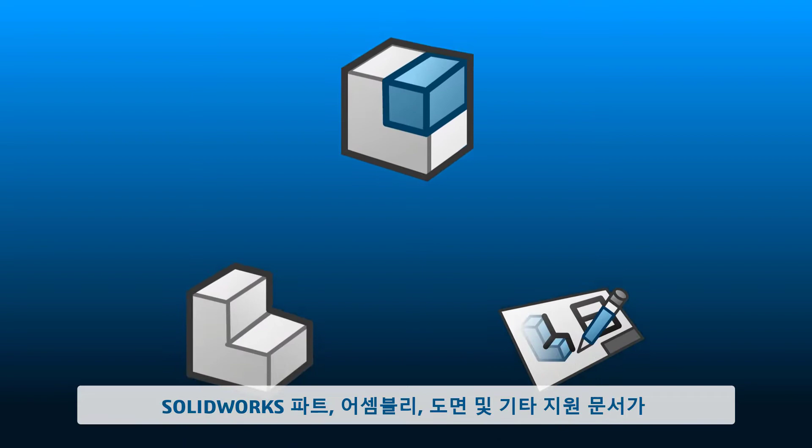Whether you work in a large organization or just a small team, no doubt you're concerned with storing, managing, and collaborating on your design data. And it's tricky, because SOLIDWORKS parts, assemblies, drawings, and other supporting documents, they're all linked. Consumer cloud storage apps don't know how to handle that. Maybe the investment in SOLIDWORKS PDM and Manage isn't right for you.

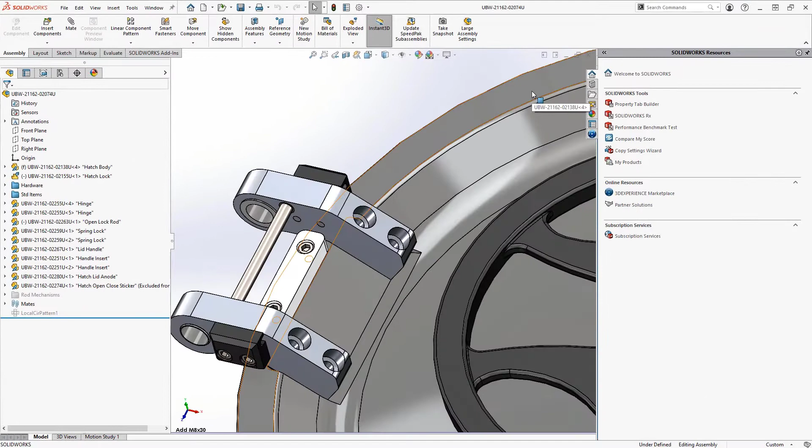There is another way. When you connect SOLIDWORKS to the 3DEXPERIENCE platform, cloud data management is just a few clicks away. Eric Engineer and Debbie Designer are part of the team working on the NEMO submersible. They are on a tight deadline to finish up the hatch design. Eric puts the finishing touches on the latch mount by inserting fasteners from SOLIDWORKS Toolbox. A quick check on the assembly drawing and everything is up to date and ready to save to the cloud.

First, he logs into the 3DEXPERIENCE platform. It's his team's secure connection to the cloud. Right from the task pane, he sees the status of his work. These indicators show which components need to be saved. As for the hardware and other standard parts, SOLIDWORKS is configured to automatically catalog and release these items so all users can access their shared libraries online.

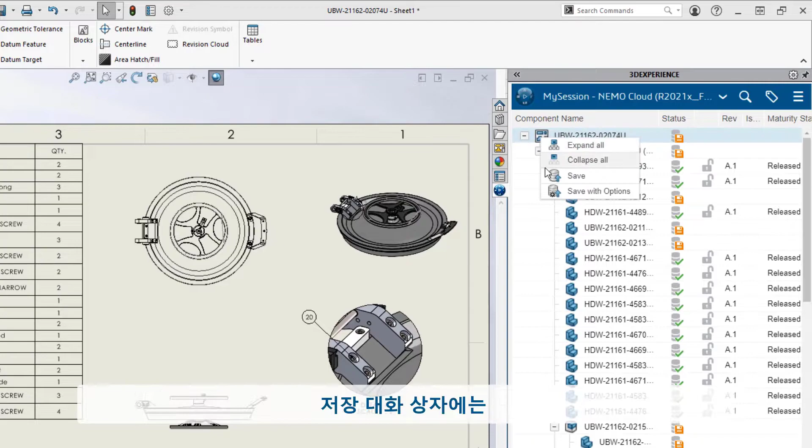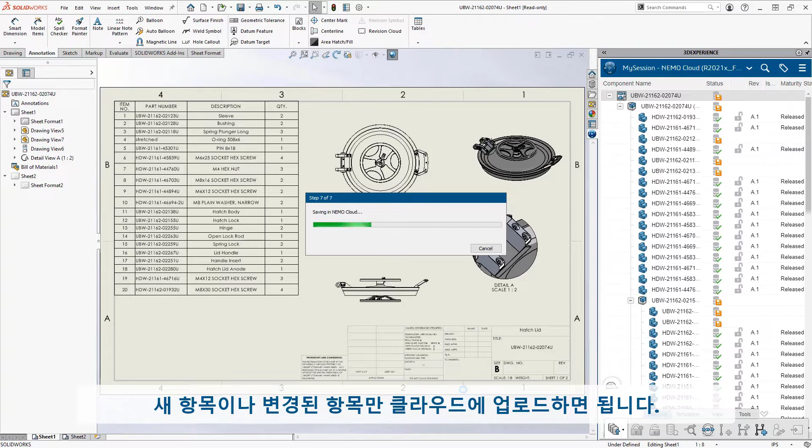The Save dialog shows exactly which items require an update. He can also assign any item to a bookmark, such as related drawing files. Out of a long list of components like this, bookmarks are a convenient way to flag them for easy access. Only the new or changed items need to be uploaded to the cloud. This makes efficient use of network bandwidth, but still ensures everything is up to date.

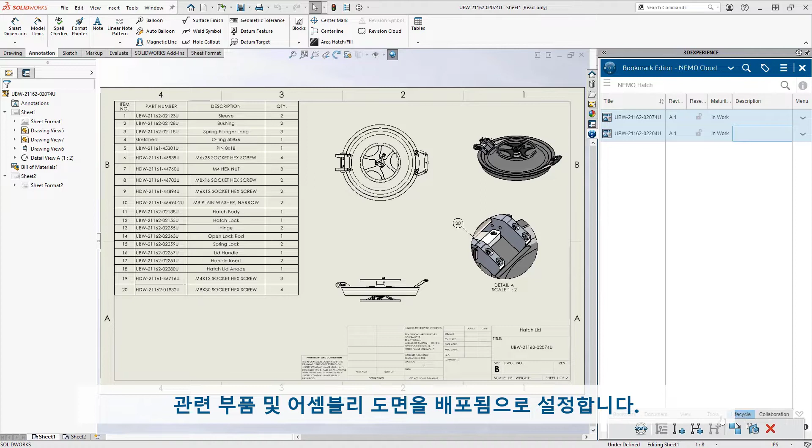As the leader of his team, Eric is able to release his own designs. Easy-to-use lifecycle operations like this help the team avoid accidental overwrites. Switching over to his Bookmark Editor tab, he sets the related part and assembly drawings to Released. It's just 2 drawings for now, but as the detailing work continues, the bookmark will keep everything organized for quick access.

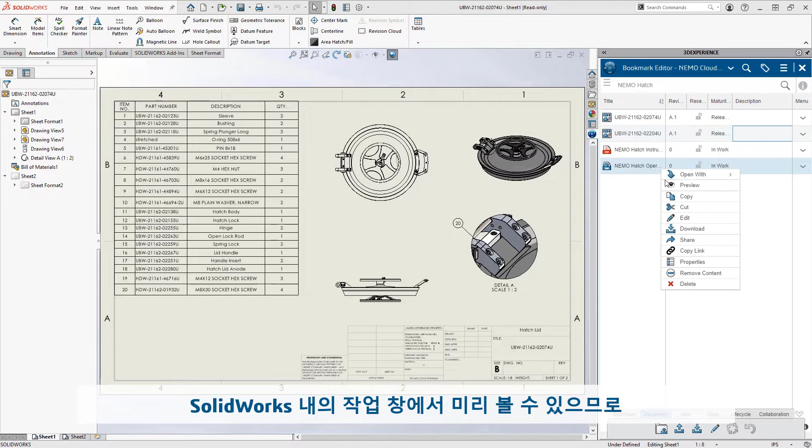That includes any other supporting documents, like this PDF instruction sheet and the related SOLIDWORKS Composer file. Most document types can be previewed interactively within the SOLIDWORKS task pane. No need to launch external viewing apps.

Eric has a backlog of finished designs that also need to be uploaded to the cloud. He can automate this with a batch save. He just selects his local design folders and assigns them to the appropriate cloud space. SOLIDWORKS takes care of the rest.

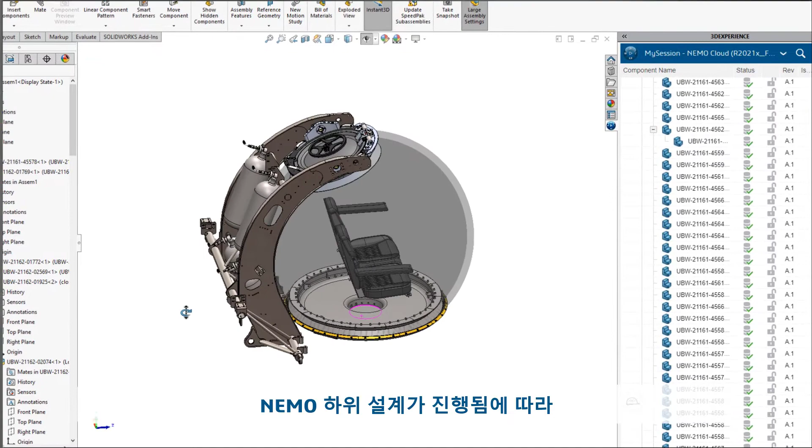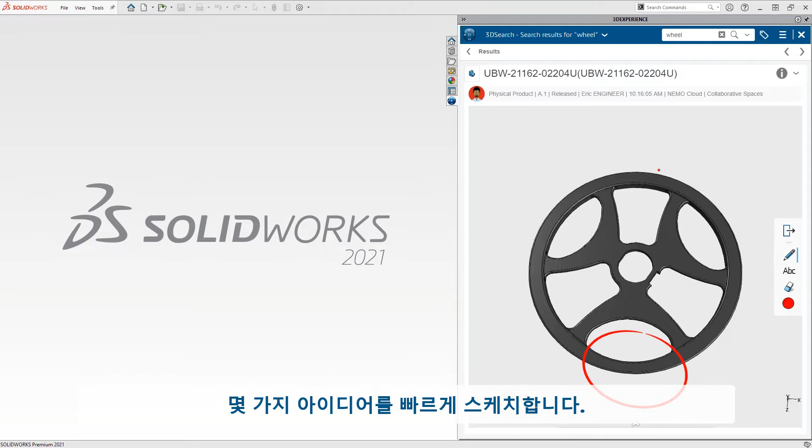As the NEMO sub design evolves, the team must respond to change orders quickly. Debbie logs into her session and sees a message from Eric requesting a change. A quick keyword search shows several results. This one looks right. Debbie uses the 3D annotation tools to quickly sketch out a couple ideas. From here, she opens the part in SOLIDWORKS. The latest version is automatically retrieved from the cloud.

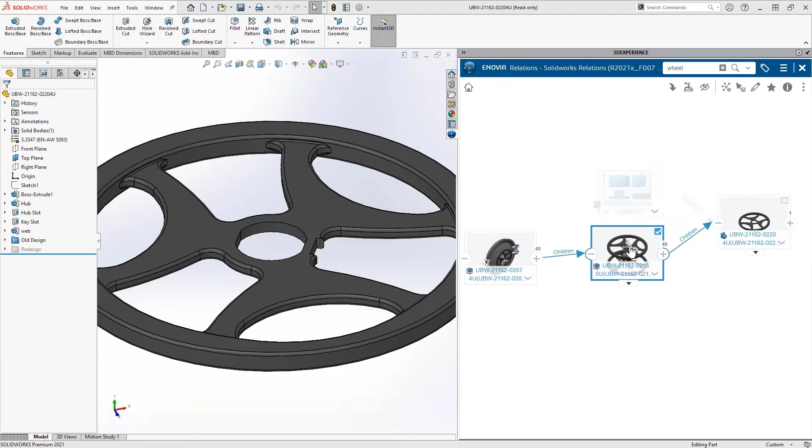Before she makes any changes, it's best to do a where used search. The hand wheel is used in one subassembly below the master hatch assembly. She can open that right into her modeling session and get to work. This version of the subassembly is released. In order to make changes, Debbie needs to create a revision of the assembly and the hand wheel.

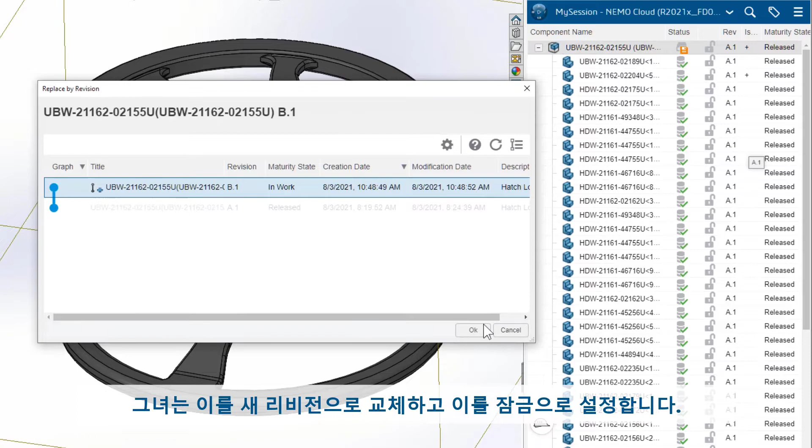The status indicators immediately show that the current assembly structure is out of date. So she replaces it with the new revisions and sets them to reserved. This gives her write access to the items she needs to modify without locking other users out of the rest of the assembly.

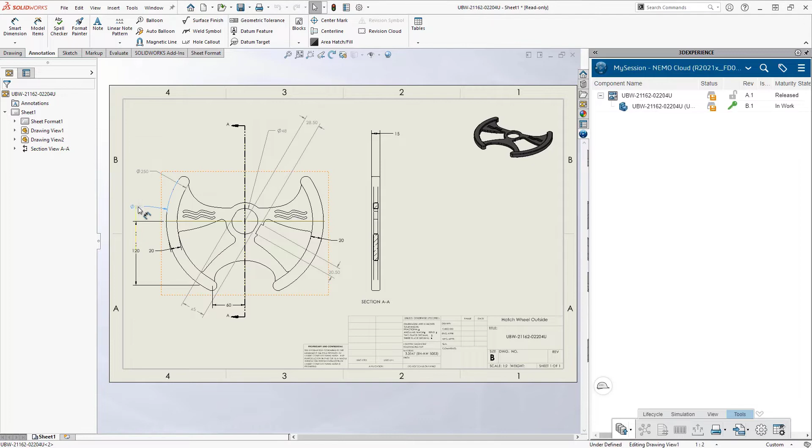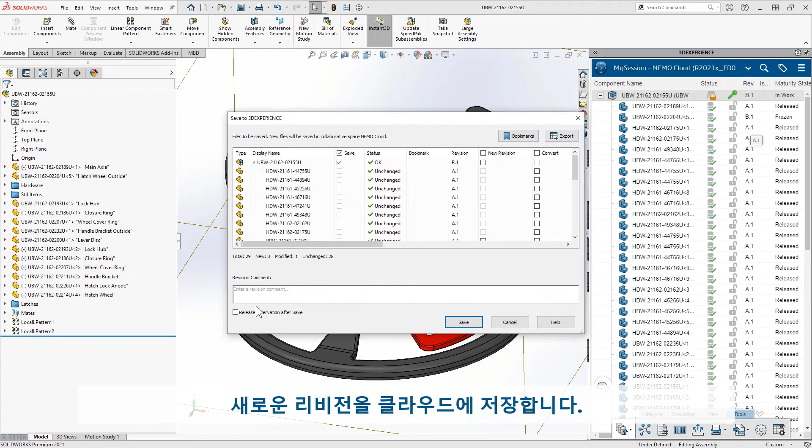The redesigned hand wheel looks great, but she needs to update the drawing. The shared bookmarks give Debbie quick access to the related drawing files. The drawing is now in sync with the part model, so she saves it to Revision B, then sets the part and drawing to a frozen state so they can be reviewed. Returning to the assembly, she finishes out the design by adding the latch mechanisms and saves the new revision back to the cloud.

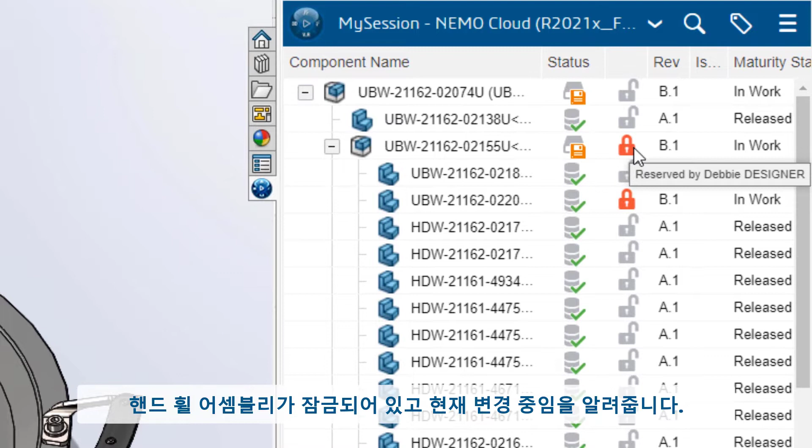In order to meet their tight deadline, the Nemo team often needs to work on the same design files at the same time. Eric is working on a new revision of the master hatch assembly. These icons let him know Debbie has the handwheel assembly reserved and is currently making changes. He can reserve the top-level assembly without affecting Debbie's work on the subassembly. This modular approach to access control allows users to design concurrently without accidentally saving over each other's progress.

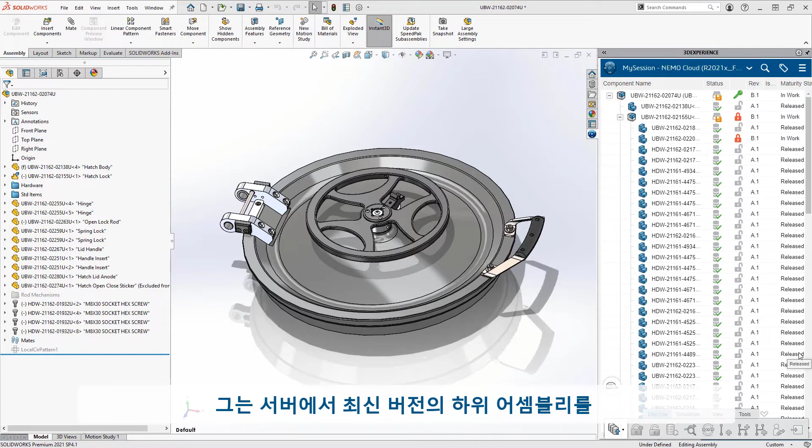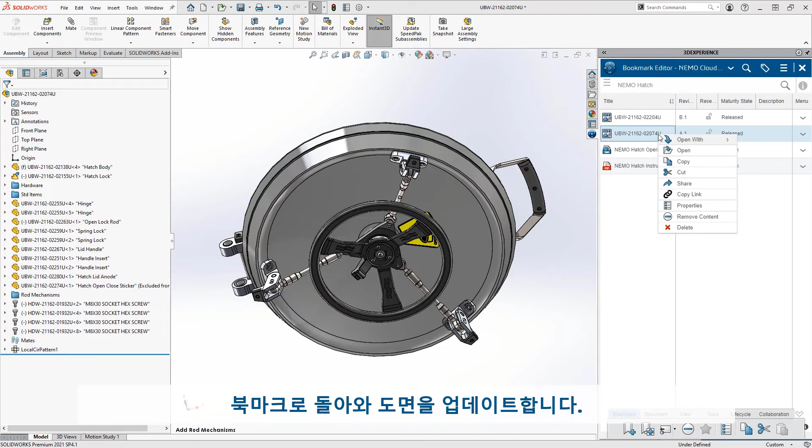A short time later, Eric sees that Debbie has finished up. He just needs to reload the latest version of the subassembly from the server. Taking a look at the handwheel drawing, he likes her redesign and moves it to released. Back in the assembly, Eric attaches the connecting rod mechanisms, then returns to his bookmarks to update the drawing. Bumping the assembly and drawing to revision B, he's ready to save.

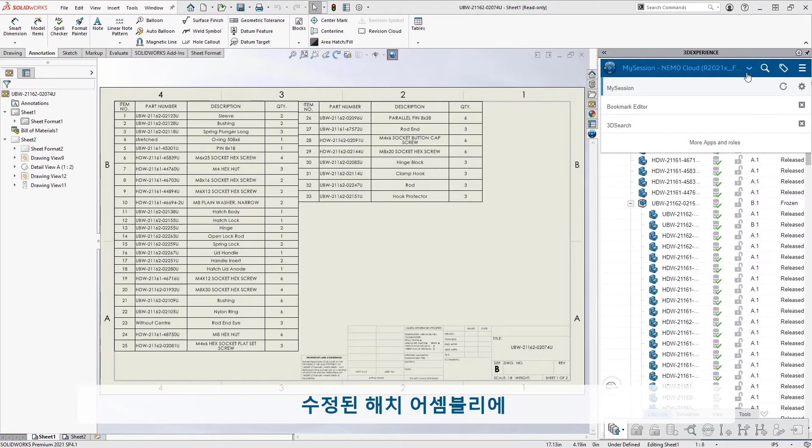The revised hatch assembly requires new versions of the supporting documents. From the convenience of his Bookmark Editor tab, Eric uploads the latest version of the Composer file and uses the interactive preview to inspect the latest revision.

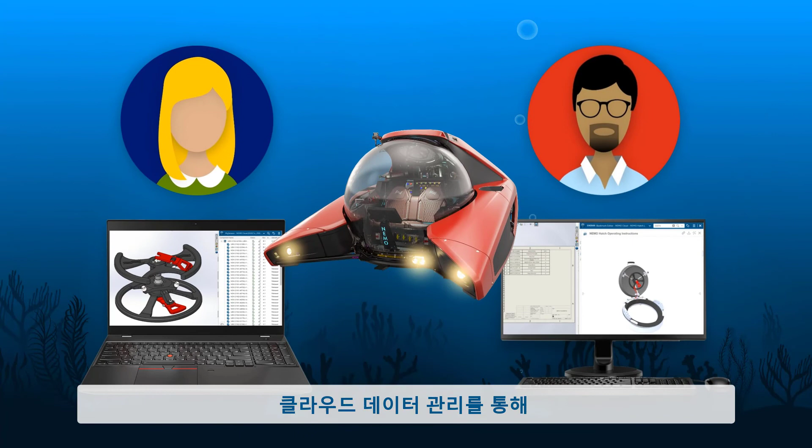Out-of-the-box cloud data management enabled the Nemo team to be productive right away. They were able to safely store their data, manage changes, and design concurrently, all without ever leaving their familiar SOLIDWORKS design environment. Everyone in the organization benefits when you connect SOLIDWORKS to the 3DEXPERIENCE platform.